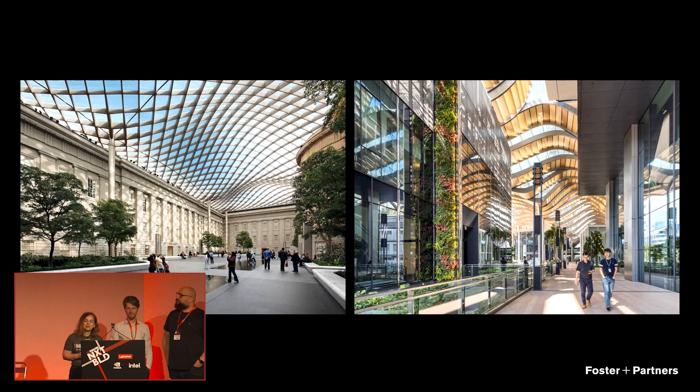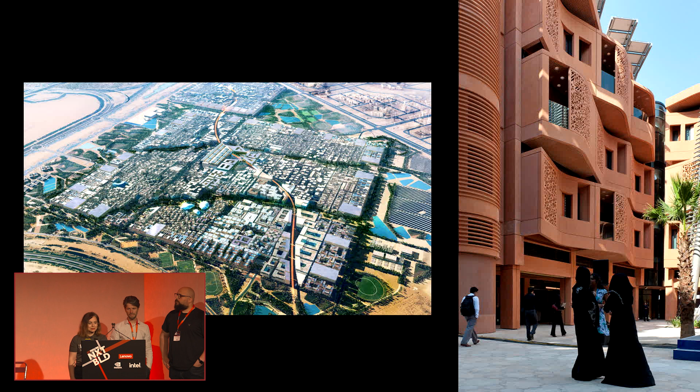We're all part of Applied R&D, a close-knit group at Foster + Partners dedicated to cutting-edge research. Having joined Foster + Partners 18 years ago, we've worked on hundreds of demanding projects and feel privileged to exploit the potential of technology every single day. At Applied R&D, we innovate through disruption and explore the art of the possible by bringing future technology to our designers. The company builds at all scales, from furniture to pavilions, yachts, bridges, towers, airports, and entire cities, and at Foster's we always strive to change the paradigm of design.

That's why at Applied R&D we look at technologies out there, not necessarily within our own industry but in parallel industries, and try to see how we can use them today in our pipelines and in the way we work. Our team has always been about 1% of the company—currently we're 2,000 people, and we are less than 20. Our common denominator is that despite our varied backgrounds, we're all accomplished programmers and share a passion for innovation and discovery.

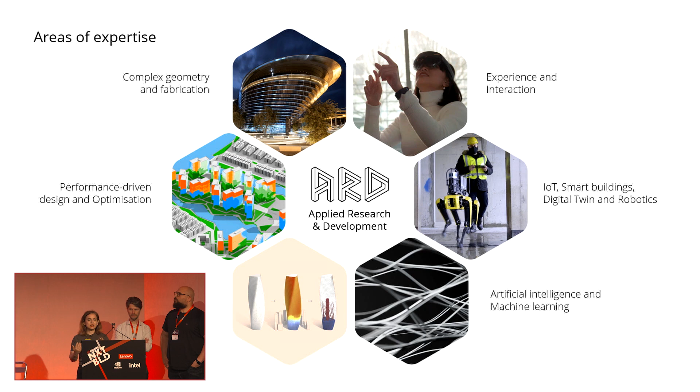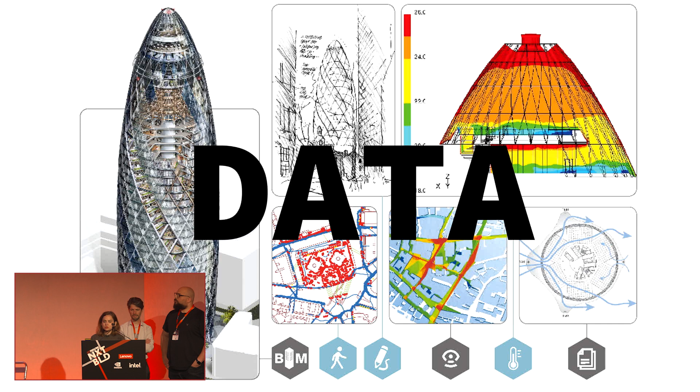That's why ARD has a wide breadth and depth of expertise in different areas—we do everything from complex designs to performance-driven design, optimization, machine learning, robotics, digital twins, collaborative design tools, XR, you name it, we probably do it. We've found that the common driver behind all these endeavors is data. Data is the underlying force that drives our decisions and designs, and can help us build better buildings for the future. That's what we're going to talk to you about today.

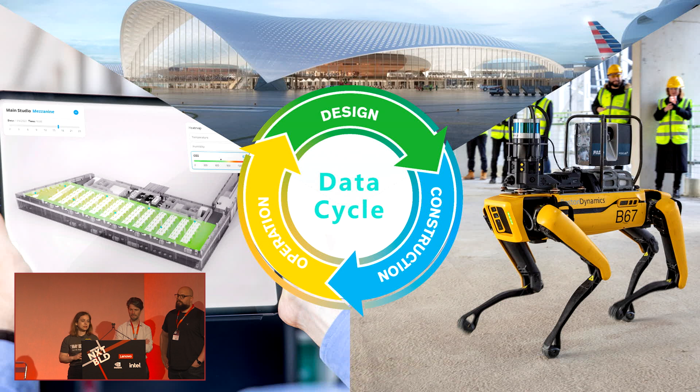How, by creating, collecting, sharing, and learning from data, we can use data as a driver for our design processes. There is a huge amount of data produced during all phases of our pipeline, from design to construction and operation of the built environment. So we'd like to start with design.

We've been working on data-driven processes for many years, and through technology we managed to deliver iconic buildings like 30 St Mary Axe, or the design for the new Mexico City airport, which would not have been possible without performance-driven design processes powered by data years back.

With that in mind, I'd like to ask Sheriff to speak a little bit about performance-driven design and the processes that drive our designs in the office.

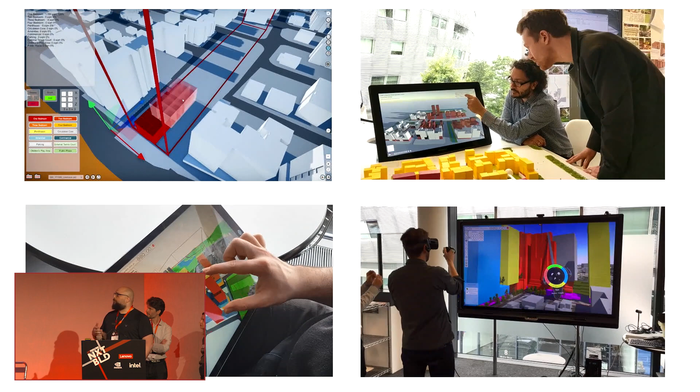The office's focus on performance-driven design and sustainability inspires a lot of the tools we develop in-house. Throughout the years, we've done many iterations on tools that help designers in early stage iterate on design options and get feedback on key insights to take more informed decisions during the design process.

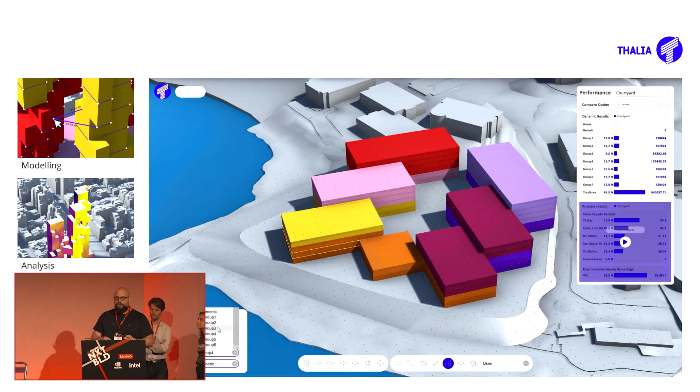The latest iteration we've been developing is Thalia. Thalia is an early-stage design and analysis tool that brings real-time feedback to all stakeholders. It features an intuitive massing interface focused on providing quick design iterations and performance comparisons between options. Users can assess options using various soft and hard metrics.

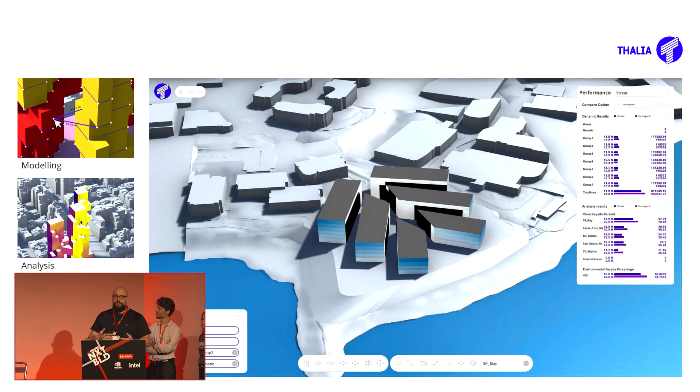One of the hurdles of bringing those metrics in real time while designers iterate on their designs was the simulation engines we were using in the background. Doing this kind of real-time feedback with off-the-shelf commercially available tools made that a very hard process, and that led us to start developing our in-house engine.

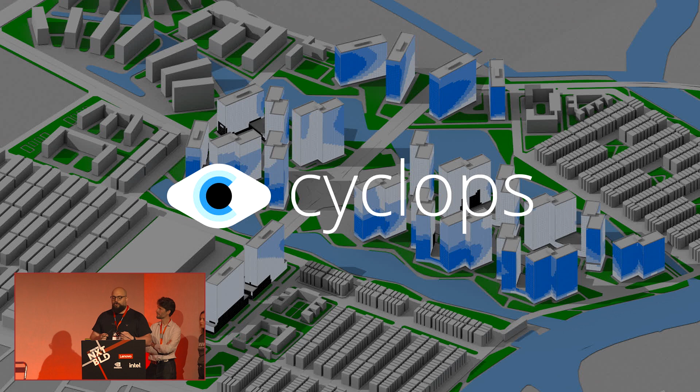This is where Cyclops comes in. Cyclops allows us to provide real-time feedback on key performance criteria, and it's our own ray tracing-based simulation engine.

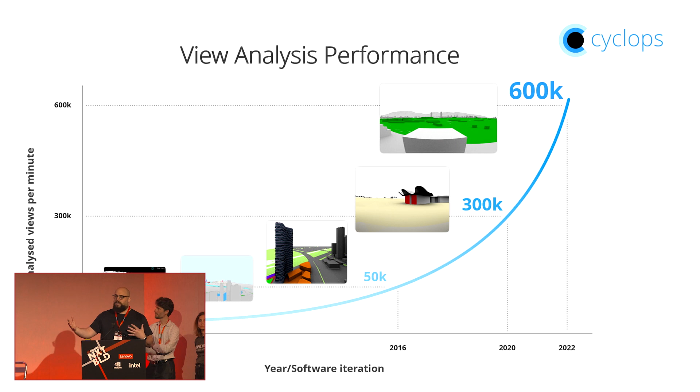Initially, 15 years ago when we started working on this, it was for evaluating views for different seating layouts in stadia, and we were able back then to evaluate around 24 views per minute. Nowadays, we're able to evaluate 600,000 views across an urban block in a minute. This jump in compute power is powered by the GPUs we now have access to. This move from CPU to GPU gives us access to orders of magnitude faster analysis, and again, this is all key to providing real-time feedback for the designers.

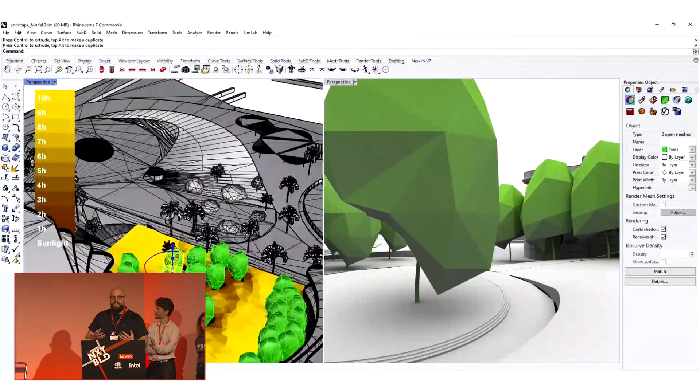You can see, for example, here a very simple workflow, but not possible with any other tool, where our landscape architects are moving around trees in an urban space and evaluating the performance in terms of sunlight access and views to the river, and being able to take decisions based on that.

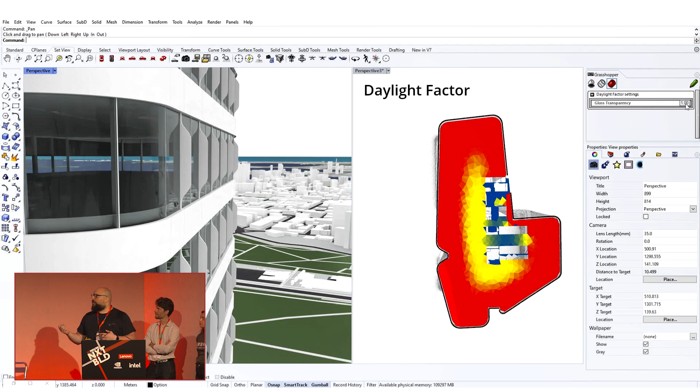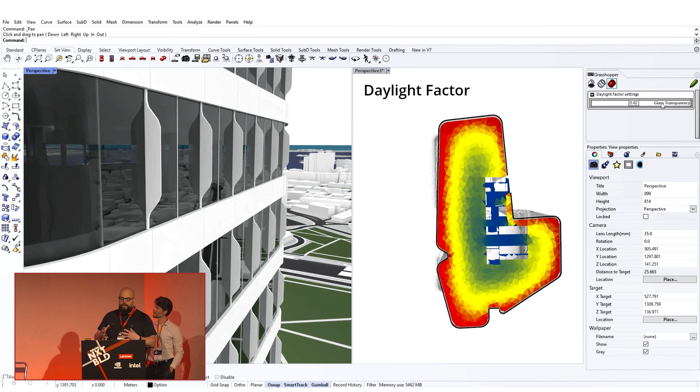Or something even more complex, daylight factor analysis. If anyone runs such an analysis, it usually takes minutes, maybe hours. Over here, you can see we're just changing the glass transparency, and we're getting instant feedback, allowing the designers to build their intuition about those performance metrics.

We started incorporating a lot of different analyses with Cyclops. Some of them are on the screen, but we also incorporated different ways of creating real-time reports.

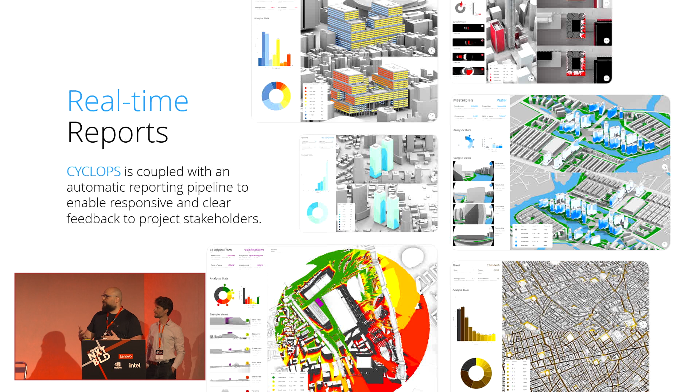A key point is conveying all this information in a well-formatted, standardized way, where designers and other key stakeholders can take decisions and understand what's happening between the different design options. Over here, you can see reports generated for view analysis, landmark visibility, overlooking risk analysis, and all of those reports get generated every time we run any analysis in Cyclops.

So we're talking about data that is provided to the user in real time, and data that is able to drive in real time the decisions that we make. But what happens when we scale up and look into distributed computing and optimization? There are very interesting things that somebody can do with genetic algorithms, for example.

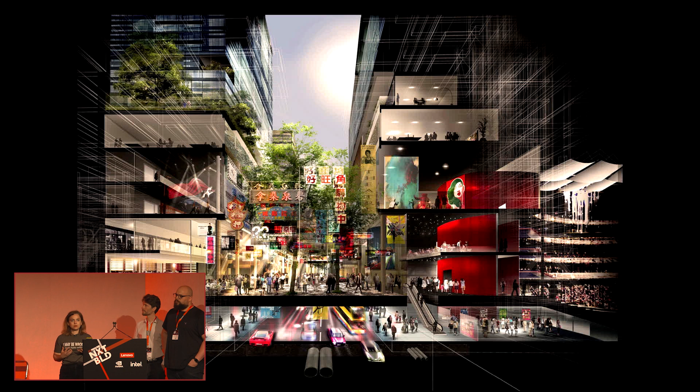So, of course, when we're talking about performance criteria for buildings, we have a certain amount of them. But what happens when we're looking at city scale decisions? From investment models to sustainability, there are a lot of drivers that can help us choose how to build a city model. And that's where Hydra comes in.

Hydra is our distributed computing and optimization software platform that leverages technologies from cloud-based web development and the movie industry. It supports our entire arsenal of analysis, spanning from environmental criteria to views, connectivity, pedestrian simulation, return on investment, and this arsenal keeps growing.

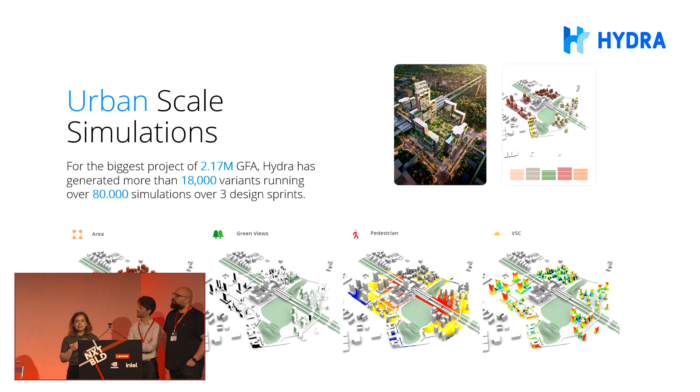Hydra effectively harnesses the power of simulation engines, like Cyclops, to turbocharge the creation and analysis of design options at urban scale. That means we are now capable of creating and analyzing tens of thousands of options, not in a matter of days or weeks, but in a matter of hours.

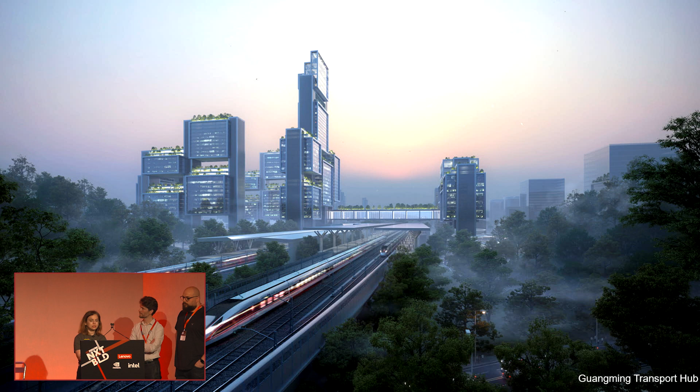A good example is our master plan for the Guangming transport hub in Shenzhen. In this case, the genetic algorithms work like that: we had the parcels and we had the design aspirations, and we could decide, okay, I'll have to do this with this technology.

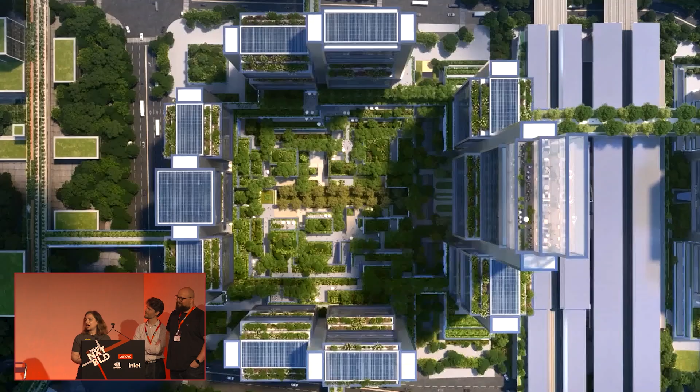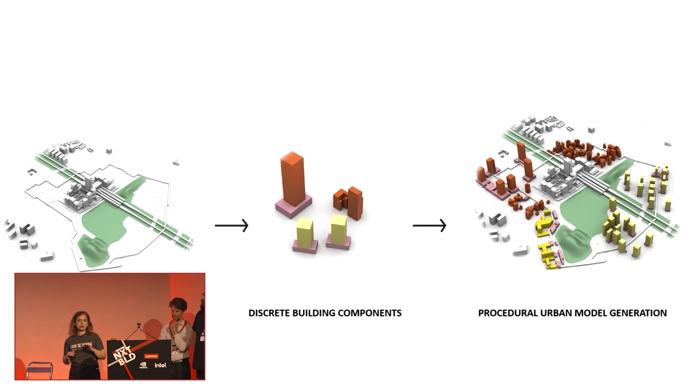We could say, okay, we will spend some time producing options, analyzing them, getting the data, feeding back the data. Instead, we said we're going to allow the computer to do the heavy lifting for us. We're going to give the computer our design aspirations, and particular objectives around areas, daylight, connectivity, and use of the green.

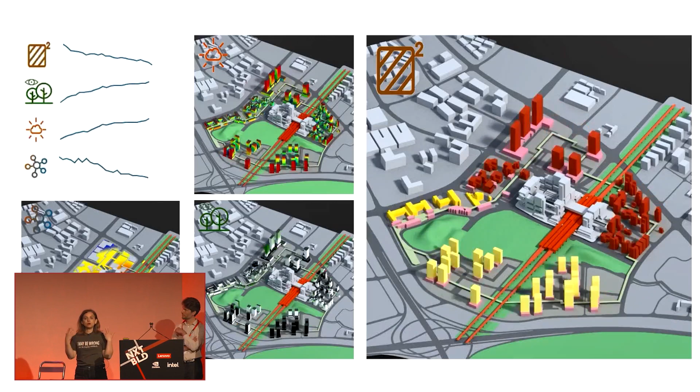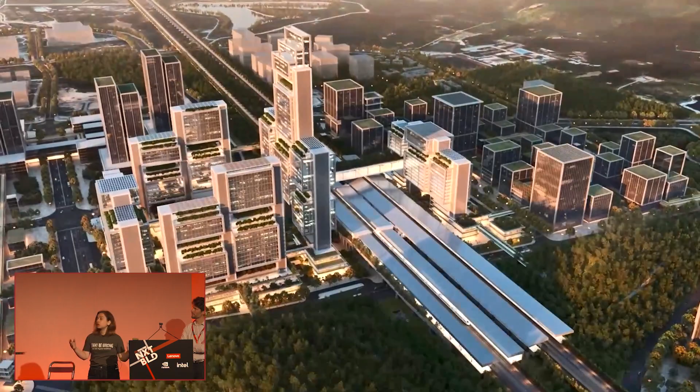And the computer ended up producing tens of thousands of options with all the relative analysis, bidding their objectives against each other, and breeding better and better solutions, providing us with the pseudo-optimal solution space on a Pareto front, where we were able to identify from the 100 best solutions out of these tens of thousands, the different concerns and how the different objectives were bidding against each other, therefore having data as a major driver, but also producing a lot of data as we went along.

So with these options, creating something like that is not the end goal—that's always the starting point of our design exploration. And through other systems, like in this case AI, we have interpolated through these huge data sets and found different ways of helping us understand how our different objectives bid against each other and how these design options end up being created.

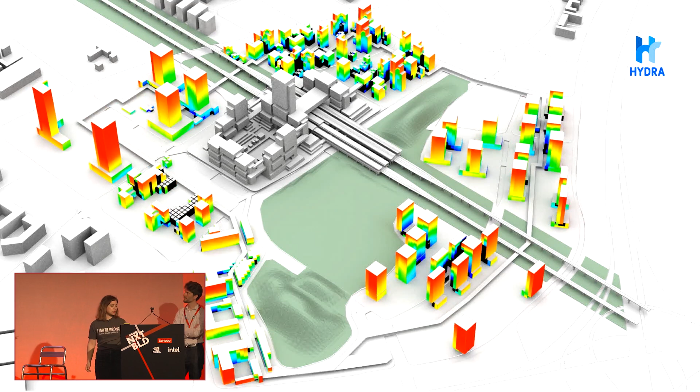When we're talking about design and data, we cannot talk about it without discussing extended reality and how this is going to transform the way we understand data as we design. We have been taking these things seriously for a long time now.

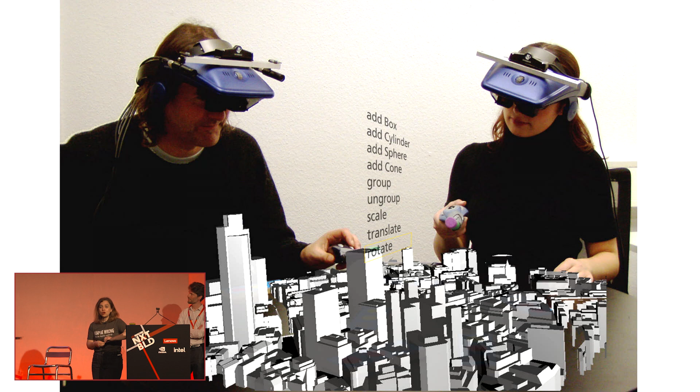More than 20 years ago, legendary Francis Aish, currently also holding an honorary PhD, has been working with UCL to develop this. At the time, Francis took headsets that were military grade and cost more than 100K per person. But he managed with UCL to create a collaboration where data was exchanged through an augmented reality interface, allowing people to work together. At the time, though, the price was not right and the hardware was not really there.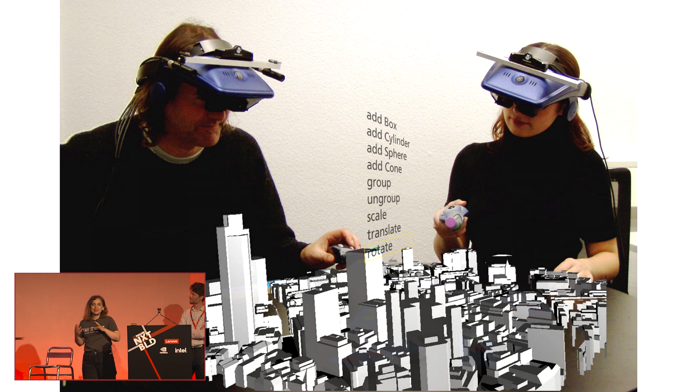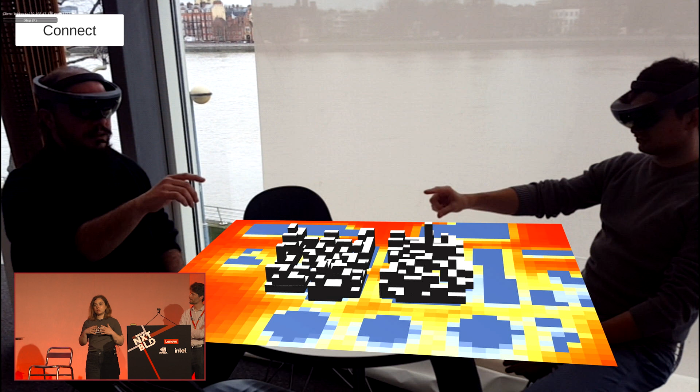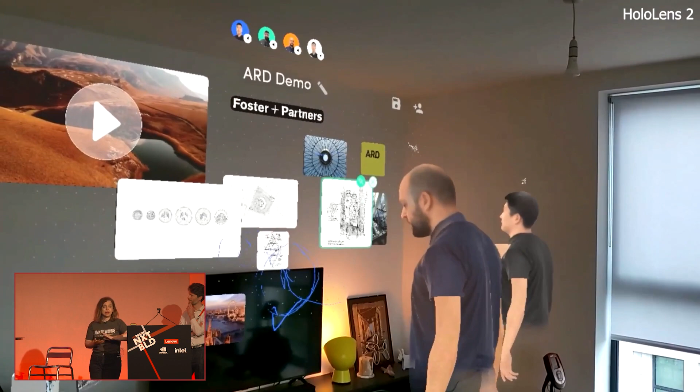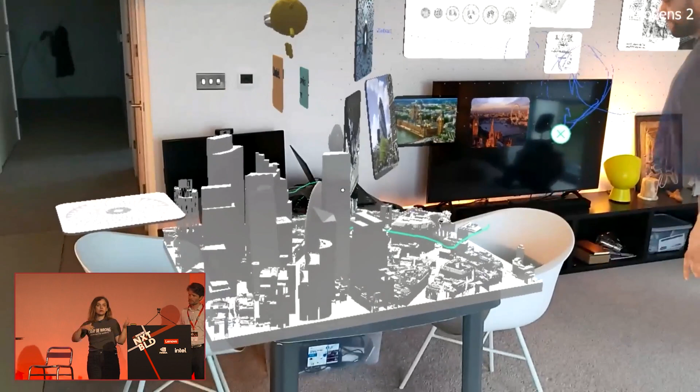The fact that we have been looking into these things so many years ago means that today we can use these technologies not just as a visualization tool, but as a design collaboration tool, at a fraction of the price. It has become very handy in exploring different types of data as we were working together during COVID, for example, running reviews with different people in their houses, but being able to exchange data, information around models, reports, movies, and all the things we needed to take into consideration.

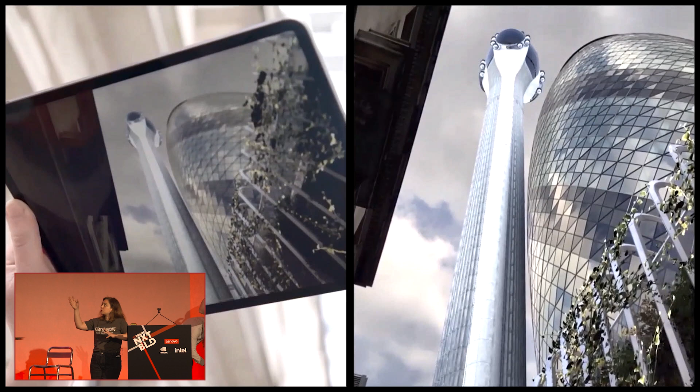Through these explorations, another product was developed, Glaucon. Glaucon has been our XR product that allows us to do things very quickly, like digital mockups, going on site, as we're doing with Tulip, with an iPad, and understanding how this building is going to be in its space, and how that information drives the decisions that we're making. You can do this in different ways with different headsets.

Two years ago, Franz and I gave a presentation, and he has extensively presented the work around this tool. But more importantly, these types of technologies allow us to not only visualize data and learn from it, but actually be part of the experience. Things like the metaverse are going to be great playgrounds for something like that. I cannot give too many details, but I can tell you that we're in that space and we're ready to go.

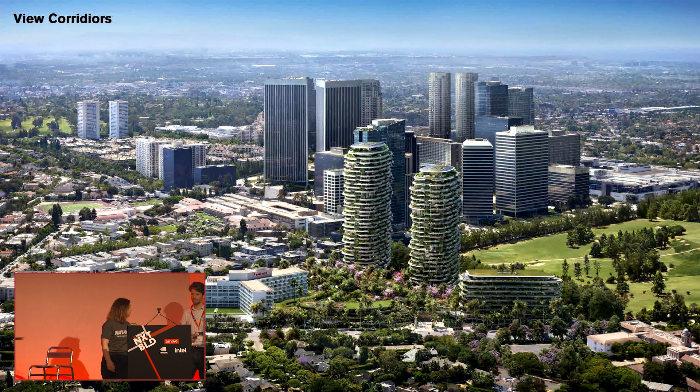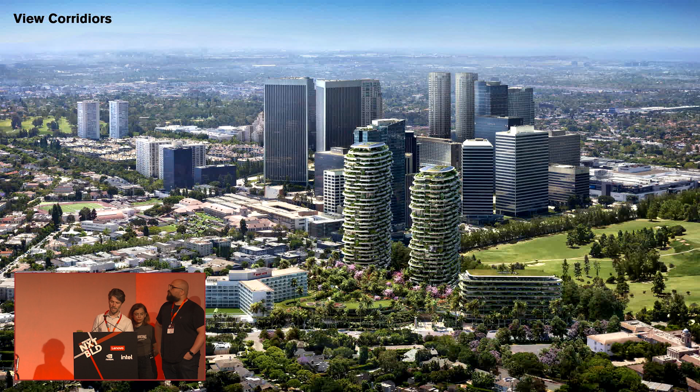As we've seen with Glaucon, data isn't just numbers and geometry. Sometimes it's the physical reality of the site and surroundings of our designs. For this master plan in Beverly Hills, California, we wanted to understand both the views from the towers towards the surrounding landscape and also how the towers would interact with each other and with existing view corridors.

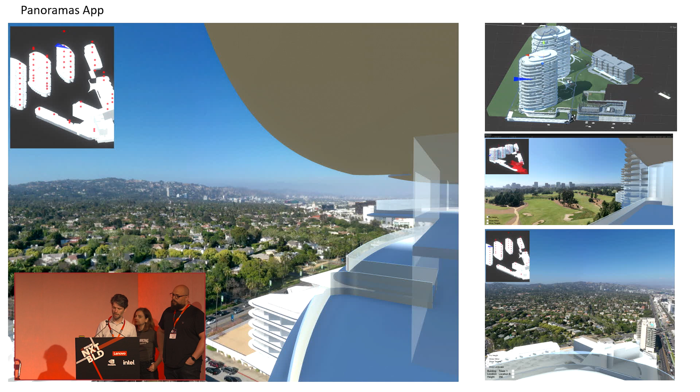We captured 360-degree panoramic photographs from aerial drones. Using gaming engine technology to display the drone photography as a backdrop to 3D models of our designs, we created a bespoke application that allowed us to simulate views from each of the residential units across the development. Two years later, we implemented an updated application that allowed us to include our design with photorealistic HDR lighting and shadows. Viewed on a head-mounted display, this made for an incredibly immersive experience of the views from each residence. There is no substitute for data like this, embodying the accurate urban context.

We've talked about how important data is in our design process, and now I'm going to look a little bit at just how critical data is in construction.

Our design for the Alif Mobility Pavilion for the 2020 Dubai Expo was one of three themed pavilions sponsored by the UAE. The inverted trefoil and its sinuous brushed steel louvers shaded the building, which remains after the Expo in a legacy function as part of Dubai's District 2020.

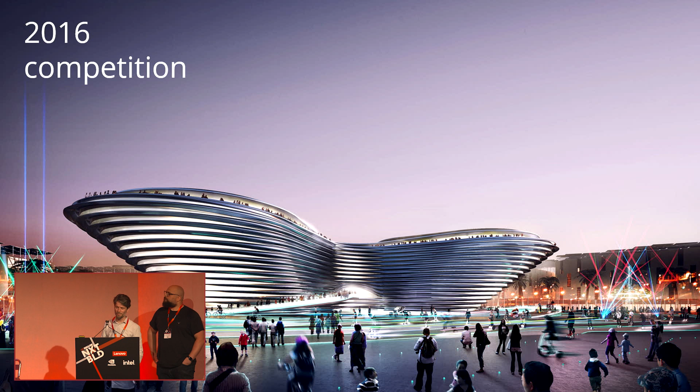It looks astonishingly similar to our vision presented in our competition-winning entry in 2016. Our ability to carefully control data throughout the design and construction is a big part of this successful transition from vision to reality.

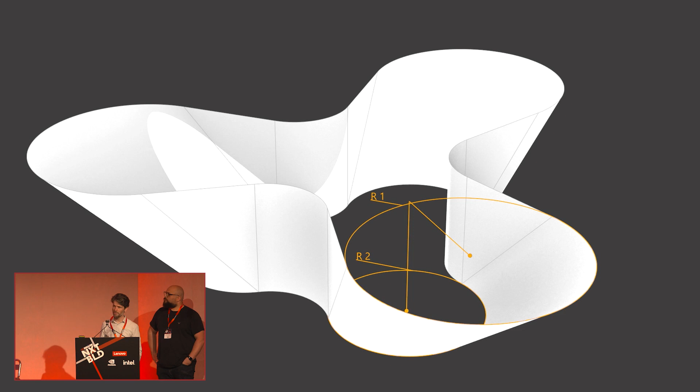The base setting out of the building's trefoil design is a fully parametric model based on simple geometric primitives: sheared cones, planar surfaces, and cylinders. Wrapping this facade, we designed the louvers, again using simple geometric primitives of arcs and lines to define each sectional profile. The facade transitions from fully closed louvers to open blades that expose the glass facade with long shading overhangs. Sine functions controlled these transitions to ensure even and tangent continuous curvature.

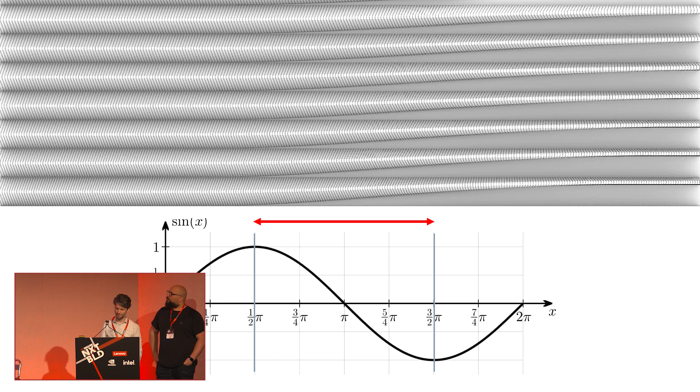The louver massing couldn't be modeled with sufficient spatial accuracy in our BIM software, so ultimately we delivered the louver model to the client, and in turn the contractor, direct from CAD. Although this CAD model and related documentation provided the source of truth for construction, we still transferred the louver model to BIM with each design iteration through use of our bespoke Hermes software, which I'll be discussing in further detail in just a bit.

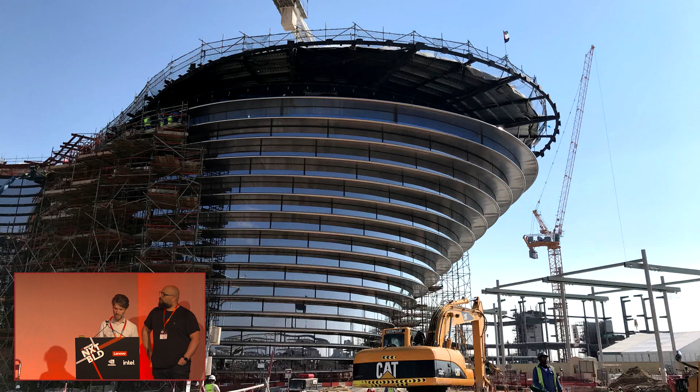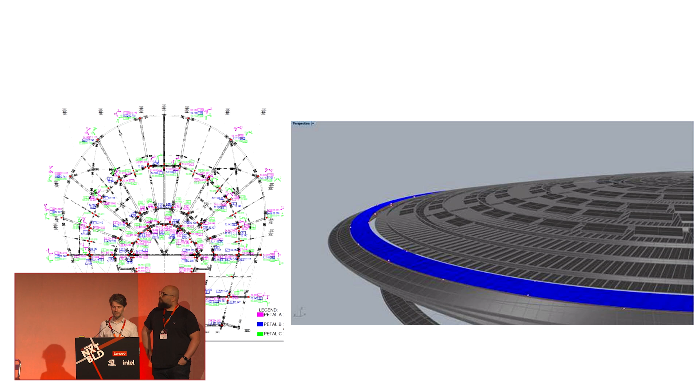Another pavilion on a smaller scale, the Pavilion of the Holy See, commissioned by the Vatican for the Venice Biennale in 2018.

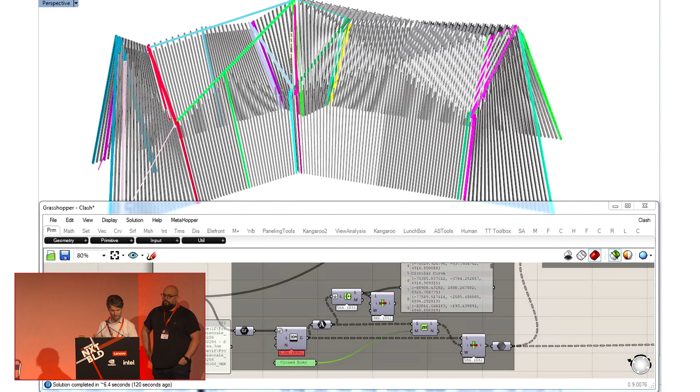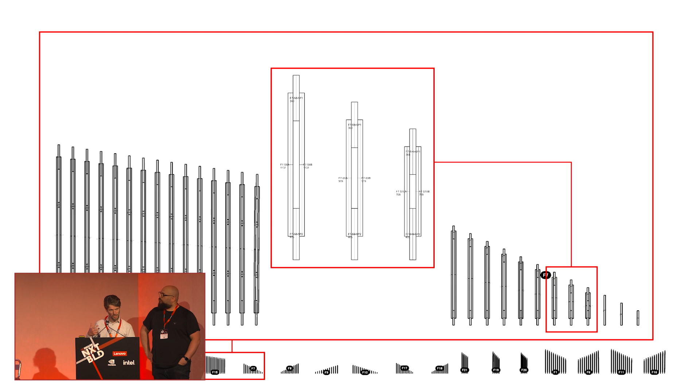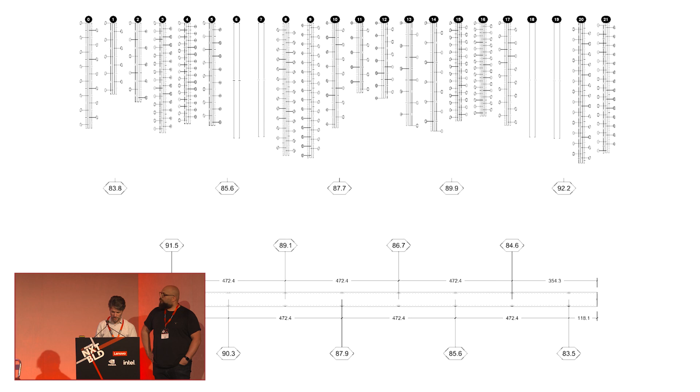Here we were working not with an ordinary building contractor, but actually the Italian furniture maker, Tecno. This became a very unusual design-build exercise, working together with them, constantly adjusting a parametric model as we were reacting to changes discovered on site, and consistently delivering and redelivering solutions as we had to react to the conditions that arose. Delivering things like a custom clash detection system developed by my colleague Sherif, and constant updated parametric scheduling of everything from the wooden cladding to the tension members with fastening holes, the angle and position of which we were constantly updating in response to conditions as they developed in conjunction with a fabricator.

So obviously, getting data between relevant parties is something that's incredibly important to us through all of these parts of the building, phases of the building life cycle. So I'm going to talk a little bit about our approach to interoperability, which largely is provided by a system we call Hermes.

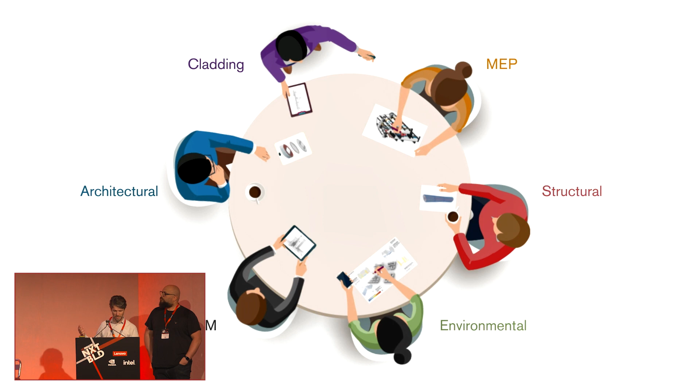Hermes is developed to address the problem of integrated design. It's really important to have everybody around the table, but traditionally that results in crosstalk. Hermes is a cloud-based server that sits in between all of the disciplines, allowing them to publish their changes as they are required, and then those changes being accessible to all of the relevant disciplines.

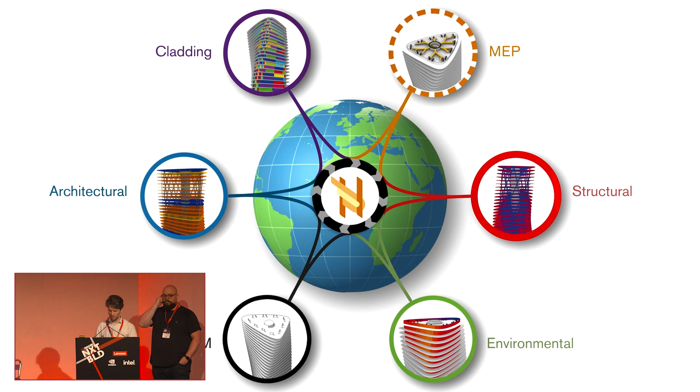We used this to great effect on our commission for the Lusail Towers.

Is this going to play? Okay, just a moment.

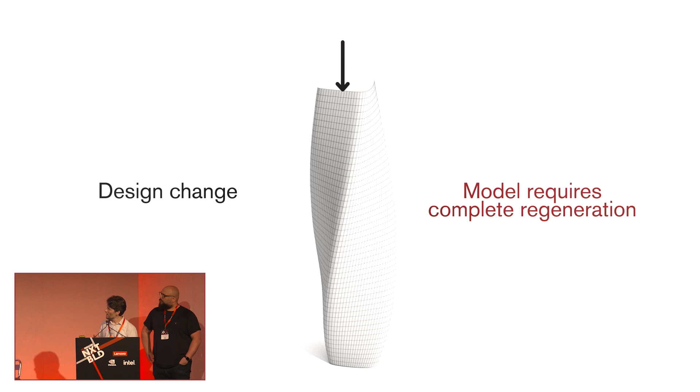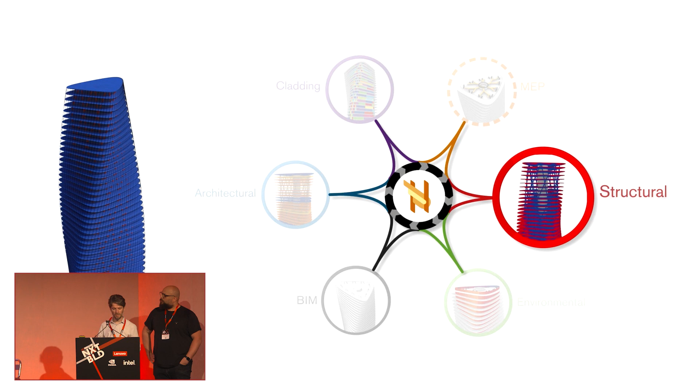Brilliant. We have all probably encountered some late-stage design changes, requiring, in some cases, a complete regeneration of a sophisticated parametric model. What Hermes does, in effect, is to connect these parametric models that might be specific to each discipline, so that when the architects issue a new model, structural engineering's wireframes update automatically. Their calculations are conducted without them having to remodel.

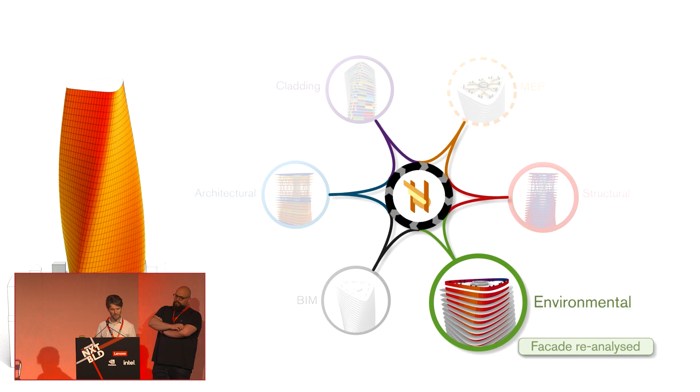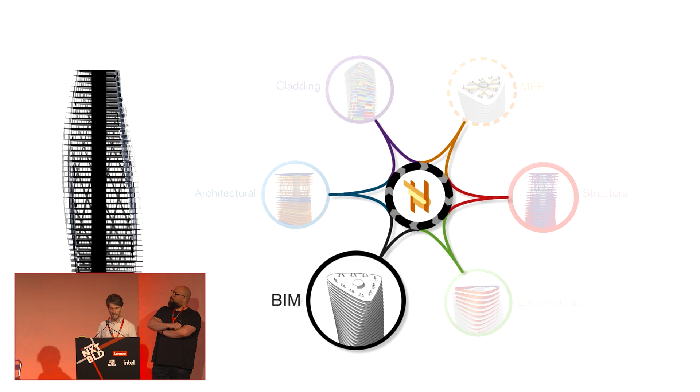Those calculations are then published to go with realistic member sizing to, for instance, the environmental engineers, then to the cladding team. Once all of these disciplines have had their say and have a coordinated model, we get a BIM model created effectively for free, accurately representing the contributions of all these other disciplines.

We've seen the benefits of managing data through design and construction. Of all the stages of the building life cycle, operation has the greatest potential for generating data because it's where the design vision and its realization as a constructed prototype meet the rich, messy reality of occupancy and climate, of retrofit and renovation.

As a practice, we're invested in the promise of digital twins to gather all of this rich data in order that we can use it to understand how our buildings perform in the wild and to inform the simulation of new designs.

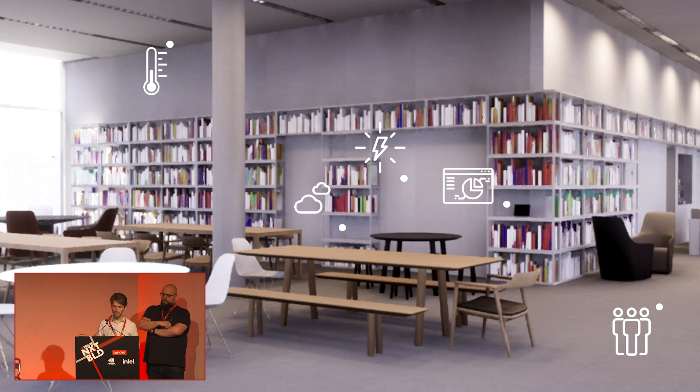We're operating a digital twin of our London campus. Starting with a high-fidelity material and spatial model, we add layers of temporal data, including interior and exterior air quality, lighting, energy usage, and occupancy information.

Much is made of the opportunity that digital twins offer to facilities managers and asset stakeholders. Our technology stack is focused on providing value to owners, operators, and occupants alike. Our IoT toolkit is the foundation of this digital twin, gathering, storing, and publishing time series data and associating it with the spatial data mentioned earlier.

We then expose this data through a variety of interfaces, from widgets on our corporate intranet, to our mobile-first smart campus web application, to our fully immersive 3D campus twin.

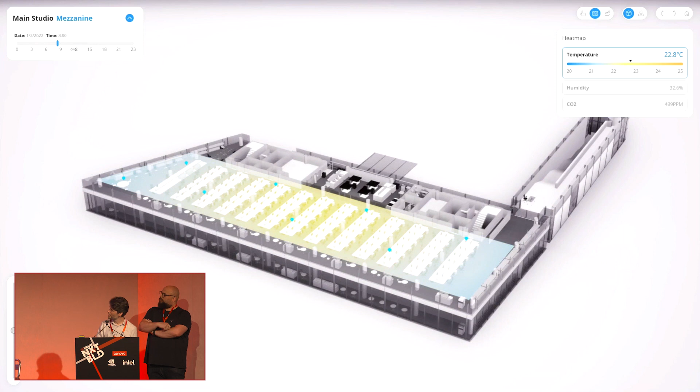The campus twin exposes our time series data for interactive exploration and provides multi-level 3D wayfinding. Interactive exploration of time series data and multi-level 3D wayfinding.

It also provides a completely immersive view of our twin, promoting the same opportunities for interactive experience like the metaverse, which Martha described earlier.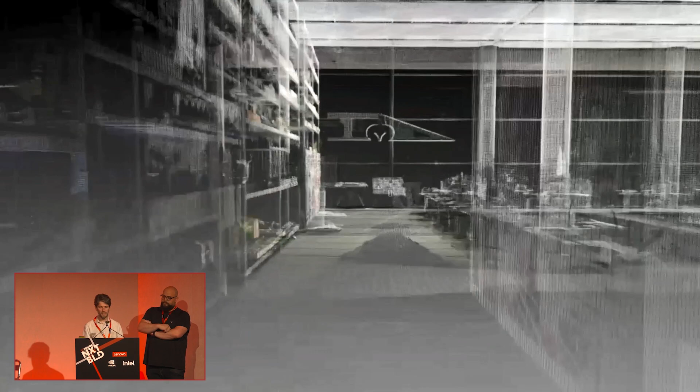I mentioned at the outset that the base of our digital twin is a high-fidelity, three-dimensional model. We're actively engaging with 3D laser scanning and photogrammetry as part of our reality capture efforts for XR and digital twins.

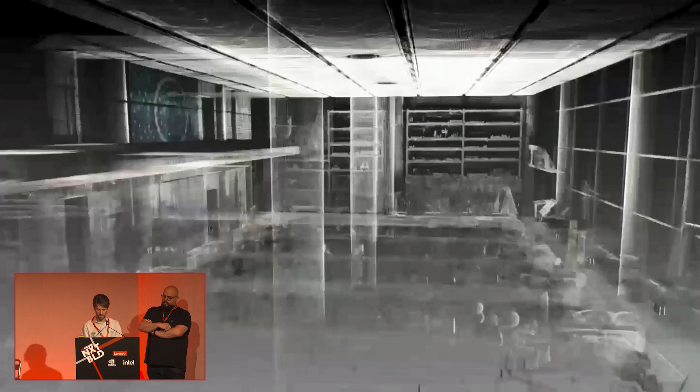We were the only architecture practice in the world to participate in the early adopters program for Boston Dynamics Spot Robot. We used Spot both on active construction sites at Battersea Power Station and at our London headquarters. We also employed Spot to capture changes to furniture and other assets within our office space during operations.

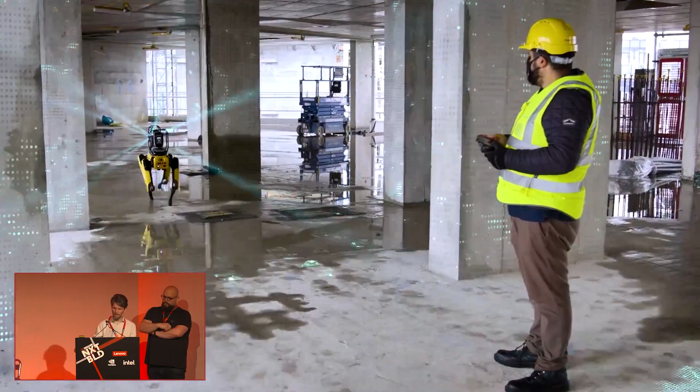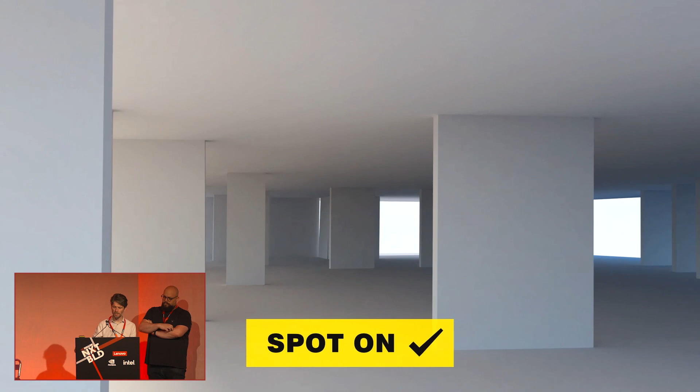The promise of autonomous reality capture is to obtain spatial scans regularly in order to complement the data available from ambient sensing. Understanding changes in spatial conditions can inform the understanding of corresponding changes in environmental conditions, energy usage, and occupancy.

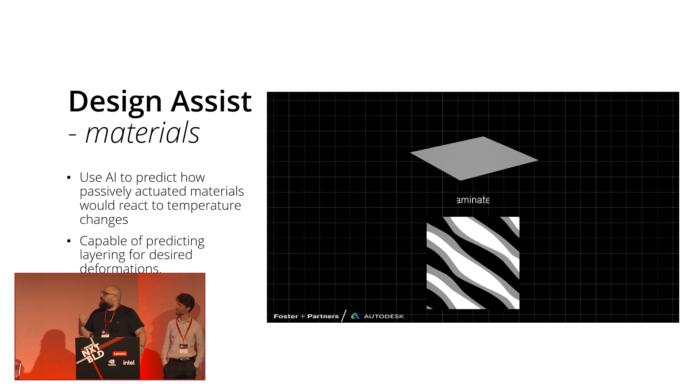From surfacing data for designers to take more informed design decisions, moving to specifying objectives and letting algorithms generate a multitude of options and design iterations, to learning from the data that we're generating. We've identified different use cases of interest to us where machine learning is of great use, and some of the MVPs that we've been working on, the research we did with Autodesk for creating design assist models that can be suggestive during the design process but incorporate the material behavior.

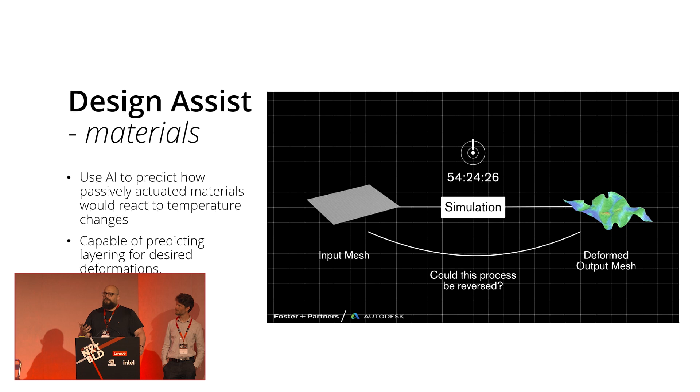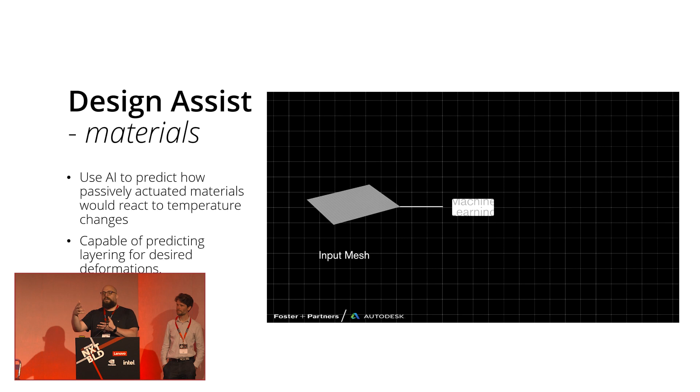So in here we're looking at thermoactive laminates and how we can flip the design process, instead of iterating on different layering mechanisms, applying the heat to the laminated product and then looking at how it behaves, to providing the design that we're interested in and using machine learning models to give us what the layers for the laminates should be.

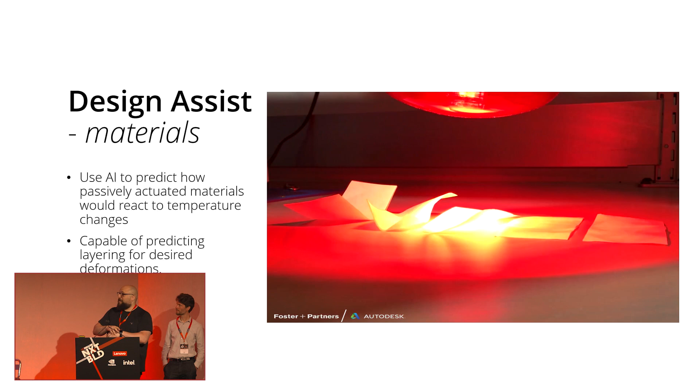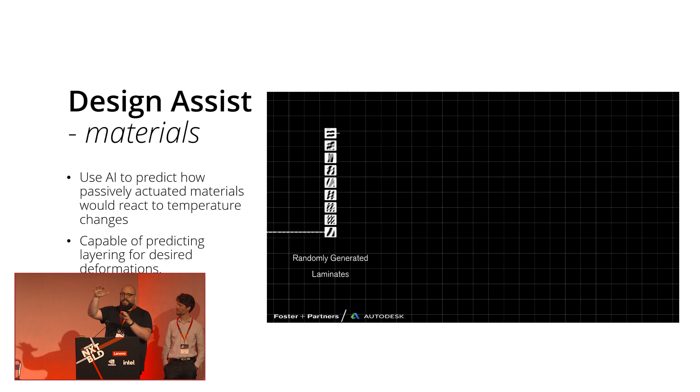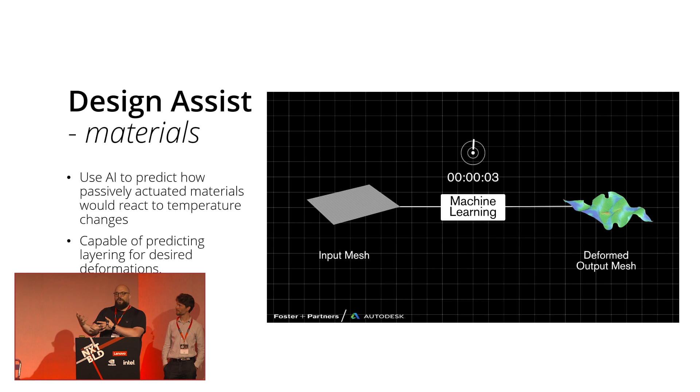Following a simple process of backpropagation using a training data set of input layers and deformed outputs, we are then able to simply flip the process around and provide a model that can sit next to the designer, and every time they decide on a design, the model would provide the input layers for such a thermoactive material.

Moving to surrogate models that can replace the actual analytical simulation that is happening, so in here we're looking at connectivity analysis and visibility graph analysis, and again, following a similar process of a curated data set of floor plans from different typologies, running them through the analytical process that usually takes time.

In that case, we were also leveraging Hydra to parallelize the computation of those outputs, and then training a model to, given a floor plan, be able to provide us with a prediction of what the output of those analyses should be, again, to speed up the way we provide designers with information in early stage design.

We've also been spending time building an in-house inference engine that allows us to deploy such models and deliver their results directly to the designers in the digital content creation tools that they're using on a daily basis.

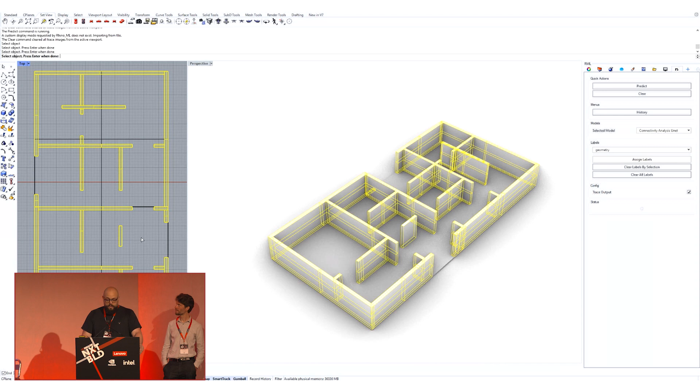So over here you can see a plugin that we created in Rhino that basically communicates with the inference API. The inference API decides the style or format of the data required from the DCC tool, applies those transformations to the data, sends it to the cloud where the model is sitting to run inference, and returns the results of the predictions directly within the tool.

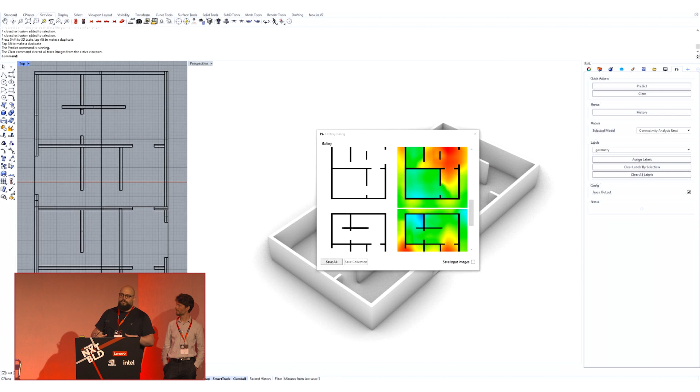This is also a shift in terms of deploying those analysis models and making sure that everyone across the company is running the latest version of those models.

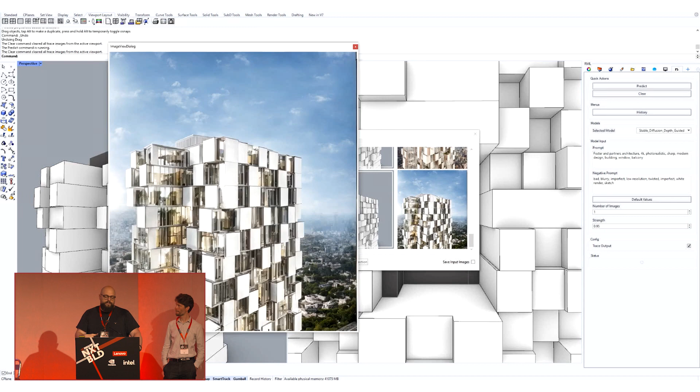By having such an architecture in place, it's also very easy to start plugging in a sandboxed environment for more recent machine learning models like different image-to-image models, and exploring how designers would use that in their early stage workflow. Here we're seeing stable diffusion running on simple massing models, getting results directly through communication with the inference API.

We've also been working on the operational side of the business's data. We've been collaborating with the project management team, looking at a lot of the quotations sent out in different projects across the globe, and looking at the possibility of leveraging this data to create predictions of what the quotations should be based on the actuals, trying to minimize the deviation between them. All of this opens up different discussions about how data should be structured across different teams within the business, and how we can leverage different tools and technologies to give us such insights.